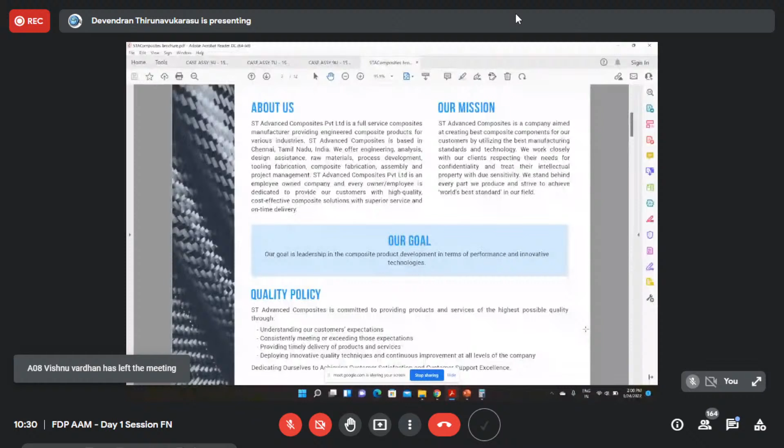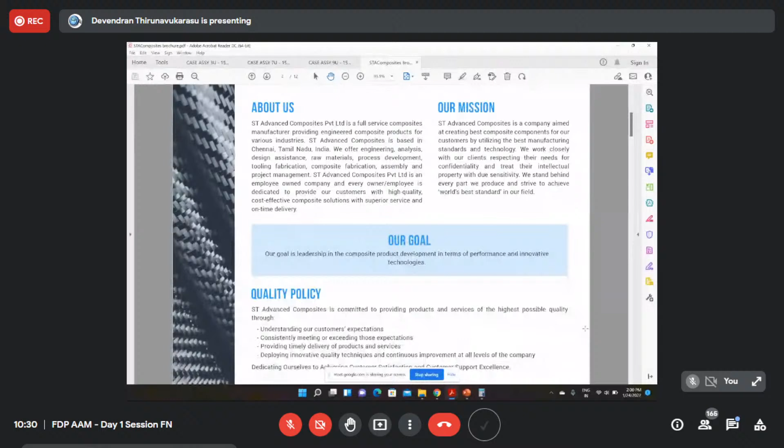Like in marine also we are working, and some of our clients give us a problem statement, and we find the solution, giving solutions for lightweighting and improving the performance of their product. Even in marine, right now we are working with L&T Shipbuilding. They are facing some problems in their shipyard, and we are giving solutions using composite materials to resist corrosion, and also to improve impact resistance against tide waves. That is one notable client we are currently working with for solving a problem statement.

And another thing, in aerospace, we are working with DRDO for projects, and we are also working overseas. We have an aerospace project with Dubai Space Center - we are supplying carbon fiber parts for Dubai Space Center and also the UAE Space Agency.

This is a notable client right now. I will explain in detail in the other slides. It started from motorsports and then aerospace. Initially we were working on drones and unmanned air vehicle structures. Currently we are producing real-time aerospace projects and products also. I will explain more in the later slides.

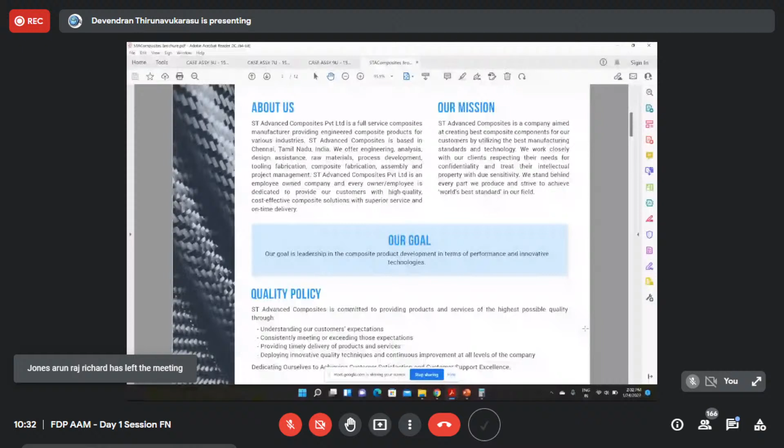We are giving quality because we are not compromising on quality in our organization, delivering without voids and without any delaminations, using the facilities available in our company and in India. We are trying to give the highest quality and the best product to our customers.

So this is the methodology we are following in our company. Initially we get the customer requirement, because we are not only focusing on a single sector - it's a multi-sector solution providing company. We get the problem statement from our customers, our team works on it, and we find the solution.

From the design side we support with design and optimization, material selection and process selection. Tooling depends on whether they need a prototype, a single-time product, or a multiple product - based on that we select the tool. Tooling cost is a high factor in the composite industry, so we work on tooling material selection, either soft tool or permanent tool.

The soft tool means it's a temporary tool for a single prototype. Based on our customer requirement, we select the tooling material. Then from the prototype we also provide testing solutions.

Whether they need componental testing, coupon testing, or full-scale testing, we support this. We are collaborated with universities and have tie-ups with IITs and private laboratories. Based on the project, we get it tested in various institutions.

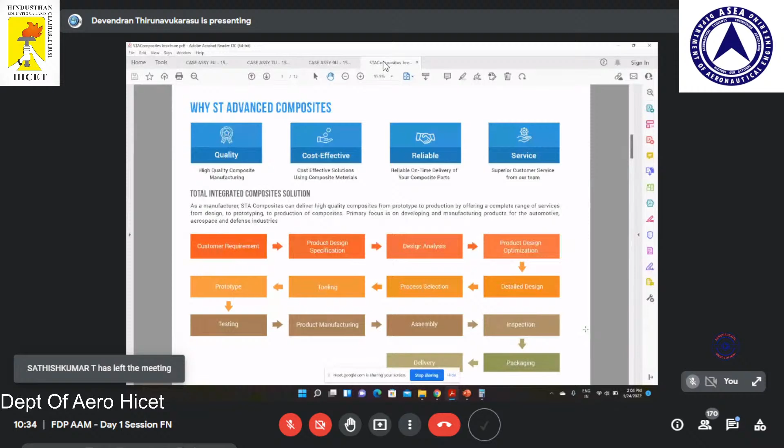We also supply material to institutions for R&D purposes, because we support students with projects. We give internships and training programs, and we conduct training programs for faculties and students. During that time we introduce advanced materials to them and give hands-on training also.

Before COVID, in 2018 and 2019, at VIT Chennai and several other universities we directly conducted development programs. During that time we were supplying materials for their R&D.

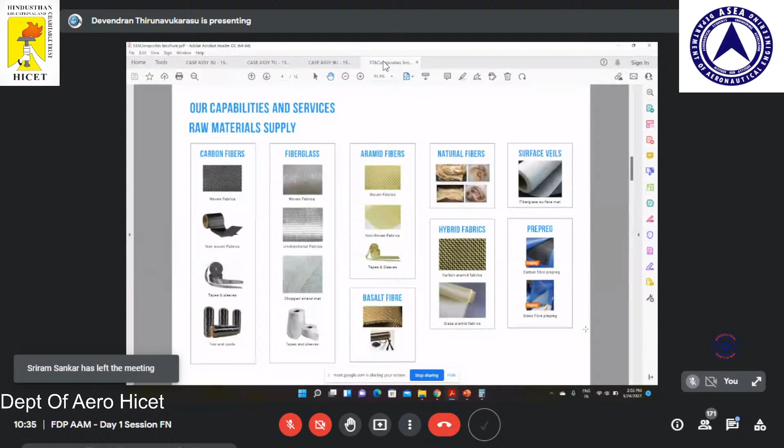These are other materials we supply, like vacuum bagging systems, resins, core materials, and nano materials - currently we are trying to implement nano materials into real-time products using carbon nanotubes and graphene. These 2D and 3D materials we are also implementing into structural and functional products, like batteries - currently we are working with one company to provide a solution for them.

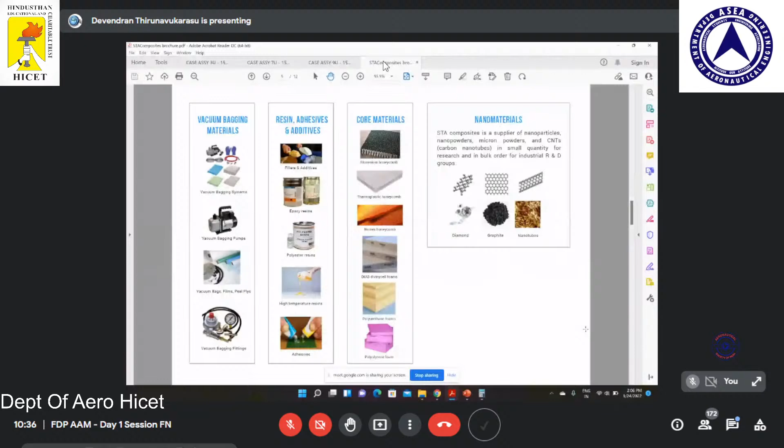This is the design and analysis part. In India composite design is very expensive, and companies are not using exact composite design analysis. Here we provide the exact approach - even Boeing and Airbus use the same method that we follow here.

From the layer-wise analysis we plan, because composite is two different materials combined as a single material, giving good properties - it is an engineered material. There are factors like ply orientation and material properties - if we change the orientation, we can get better properties.

Here we mention 0, minus 45, plus 45, and 90 degree orientations. If you use 0 and 90, we can get better tensile and compression properties. The plus or minus 45 orientation is for...

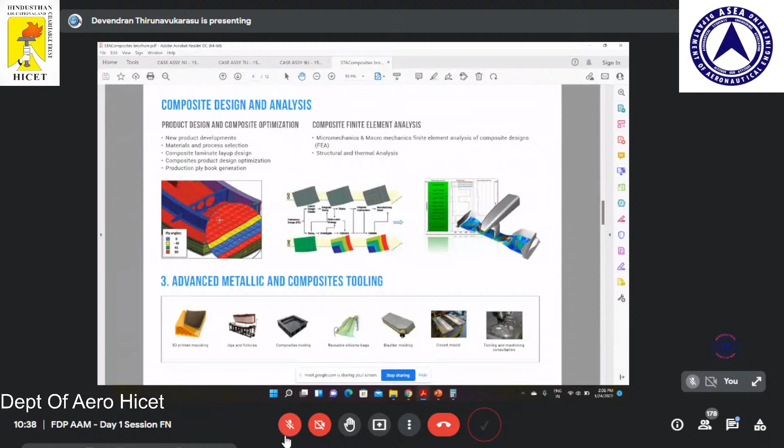There are different types of tools, as I mentioned, including 3D printed molds. We use tooling with fixture and carbon fiber tools. This is a reusable bag, this is a bladder mold, this is a closed type of mold, and this is machining and processing.

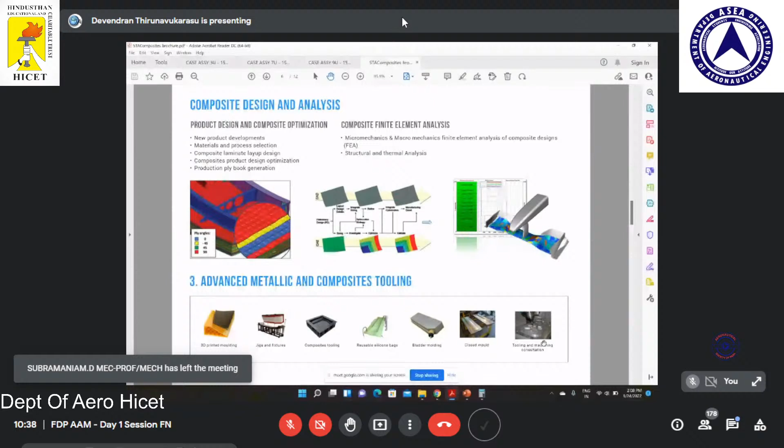We also do consultancy for tool development. This is our prototyping service. Prototyping starts from the basics, beginning with clay modeling.

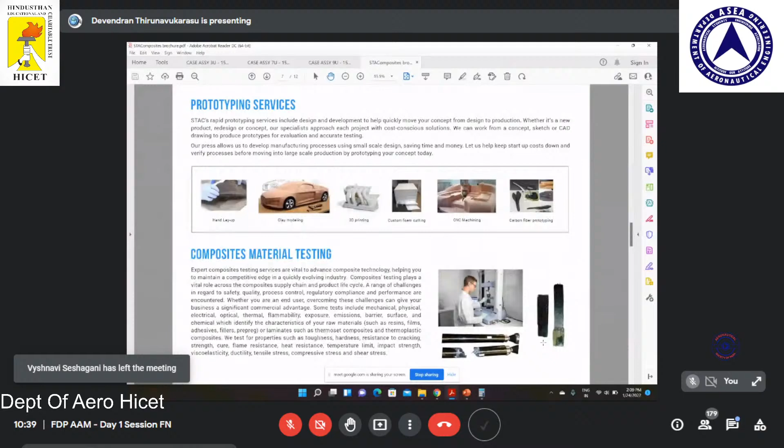In all automotive companies, they initially start with industrial clay modeling, then 3D printing and foam cutting. Foam is used for smaller prototypes, and wooden prototypes using medium density fiber board, which is available in the market, are also made using a machining process.

We also do carbon fiber prototyping based on our customer's requirement.

For testing, we have only one or two in-house testing facilities, but otherwise we collaborate with institutions and private laboratories across Chennai. Some samples are tested at PSG Coimbatore, as we have a tie-up with them and they test our samples using their material.

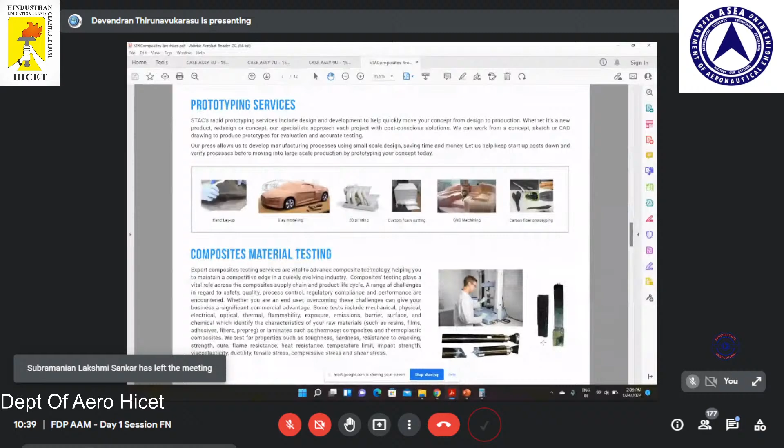These are the manufacturing techniques we currently follow: electric curing oven, compression molding, vacuum bagging technique, closed mold and resin infusion for larger structures, bladder mold for blades and other structures, and roll wrapping. Based on the project, customer requirement, and budget, we select the process to satisfy their needs.

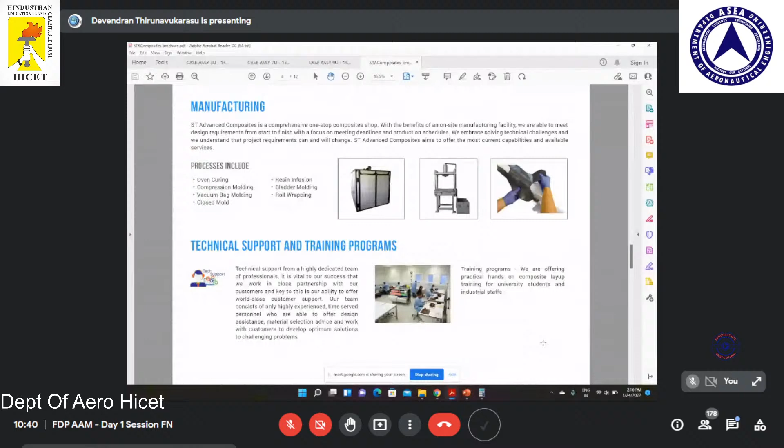We also provide technical support and training programs for engineers, as well as research scholars and students in institutions.

These are some products we have been supplying, including carbon fiber tubes, sandwich panels, and plates for drone manufacturers. University students also buy these products for their college projects and for competitions involving drones and other structures.

We also make custom products. This race car was where we initially started with motorsports, so we have this kind of product line: a carbon fiber seat, a monocoque structure for race cars, a battery box, a one meter size blade for unmanned air vehicles, and suspension linkages.

As I mentioned in the previous slide about training programs, we provide a laminating kit for participants and give hands-on training.

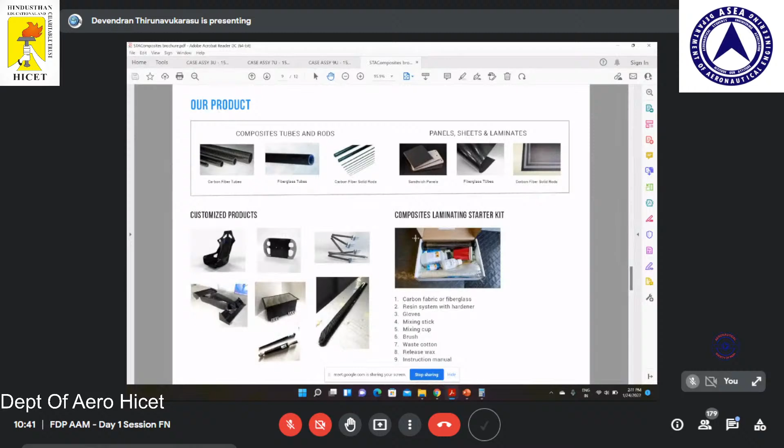These are our success stories, mentioned up to 2016. After that, I'll show some other things in the following slides.

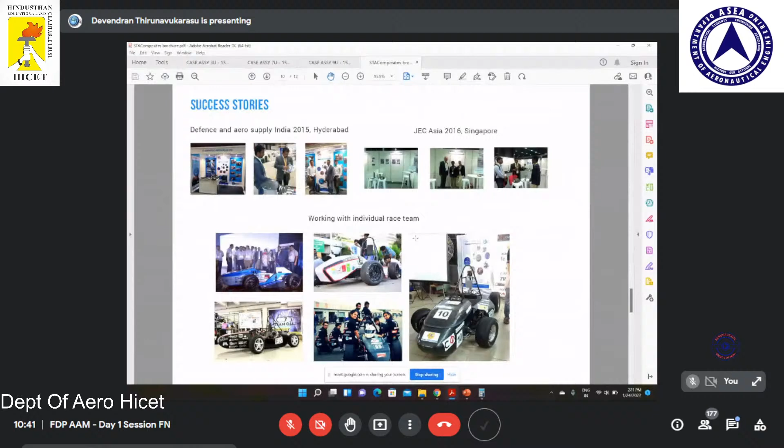In 2015, we got a stall at Defence and Aero Supply India, where we presented our products, including a bulletproof helmet we were developing through R&D in our company. We presented there and got good tie-ups and introductions with companies. This is 2016, where we got a stall at JEC Composite Asia.

This is the largest composite trade show in India, sorry, in the world.

So we got a stall, and we also presented here. There we got a lot of collaborations, and the introductions into the international market.

So these are the teams we currently support: IIT Bombay, SRM University and IIT Madras, VIT Vellore, Chitkara University Punjab, and also another team from IIT Madras. We are sponsoring the teams and guiding the students on how to manufacture the monocoque structures and composite panels for their vehicles.

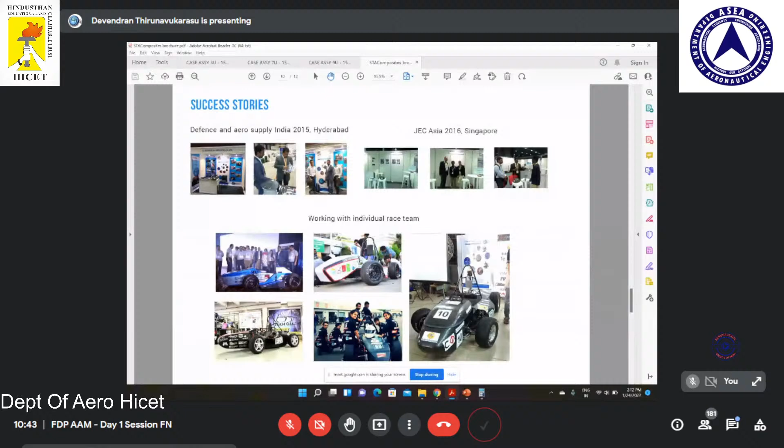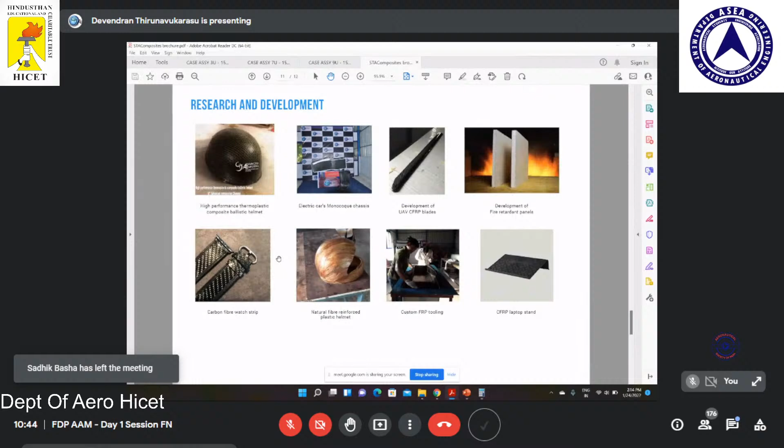Yeah, that's all, this is our company's short introduction. Then I'll move on to today's presentation.

Hello? Hello? Hello? Yes, sir, audible, sir. Audible. Okay, yeah, so now I'll move on to today's presentation.

Today I'm going to present the development and characterization of natural fiber reinforced thermoplastic composites. Today's faculty development program is about the characterization of aerospace materials, but here I'm going to present natural fiber.

Why the link between aerospace and natural fiber? We are trying to use natural fiber reinforced thermoplastic in the interior materials for aircraft. That's our idea. But there are many qualifications required for materials, and currently developing material needs qualification, because if we are going to use natural fiber reinforced thermoplastic material in aerospace or aircraft interiors, we need a lot of qualifications.

But here we are using thermoplastic. The thermoplastic is already currently used in aircraft interiors. Currently they use high performance plastics like PEEK, PPS, and PEI, which can withstand up to 350 degrees Celsius.

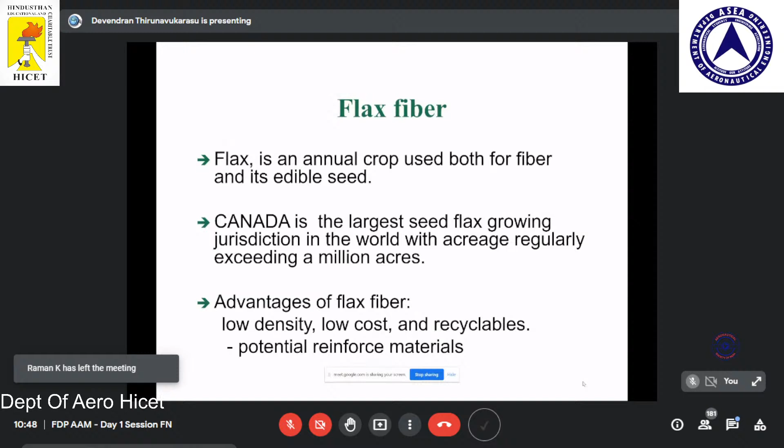The flax fiber as a reinforcement has three different fiber categories. Fiber 1 has a fiber content up to 98 to 99%. Fiber 2 category is 85%, because there are some impurities.

Fiber 1 depends on the quality; the fine fiberization yields up to 99% fiber content. In fiber 2, there are a lot of impurities, which is why it's 85% - the processing cost is higher there. If you need pure 99% fiber, you need higher processes, so that's why the cost is included.

The fiber flax 3 category is 42%, with a lot of impurities and some waste materials. Fiber 1 can be used as reinforcement for composites, and fiber 2 and 3 can be used for insulation panels for houses and alternative construction materials.

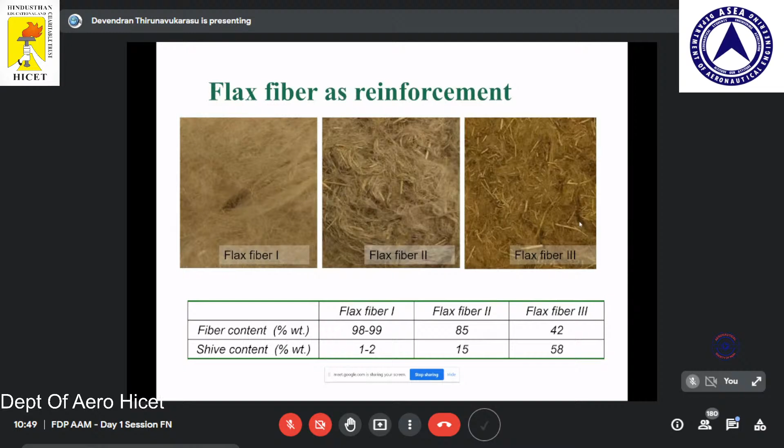This is the composition of the biofiber. The biofiber structure has four kinds of ingredients: cellulose and hemicellulose, pectin and lignin, and wax, and also water content.

High category fibers are flax, hemp, jute and sisal. Jute and hemp we have now. India also has the source, and flax is also available in some percentage.

The categories mentioned include cellulose, which is an important material for reinforcement - we need this cellulose alone for our composite. So initially we have to do the retting process and alkaline treatment of the fiber.

The first step is to remove the water content from the fiber. The second step is to remove the wax, which is dissolved just by being in hot water.

Pectin and lignin are the hardened materials in bio natural fibers. For pectin and lignin, we have to use alkaline treatment or acid hydrolysis to remove that part. But right now lignin is being used for reinforcement - lignin is a kind of natural fiber thermoplastic.

Currently some companies are trying to use lignin as a raw material for many applications in Europe. Hemicellulose is also used, but when we do the alkaline treatment and acid hydrolysis process, these two parts are removed, and finally we can get 64% cellulose - giving us good reinforcement strength in our composites.

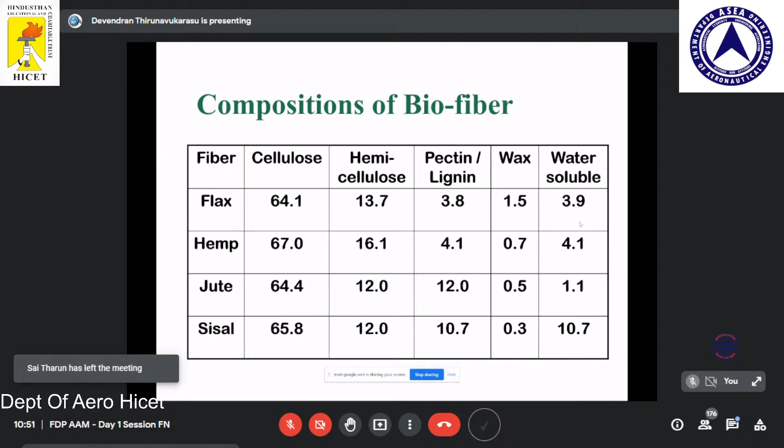The biocomposite consists of a polymer as matrix, a biopolymer as matrix, and the fiber as reinforcement. These two materials together give us a composite, an engineered material for many applications.

The interest in using natural fiber as reinforcement is currently growing, with many applications. That's why they are using natural fiber. Some potential applications for this kind of panel are doors and instrument panels, and our scope is to plan to use this kind of part in aircraft interiors.

But for aircraft interior parts, we need qualification testing and certification from agencies. I think it will take so much time and so many years to get approval for this kind of natural material. But there are other applications too, especially in aircraft manufacturing.

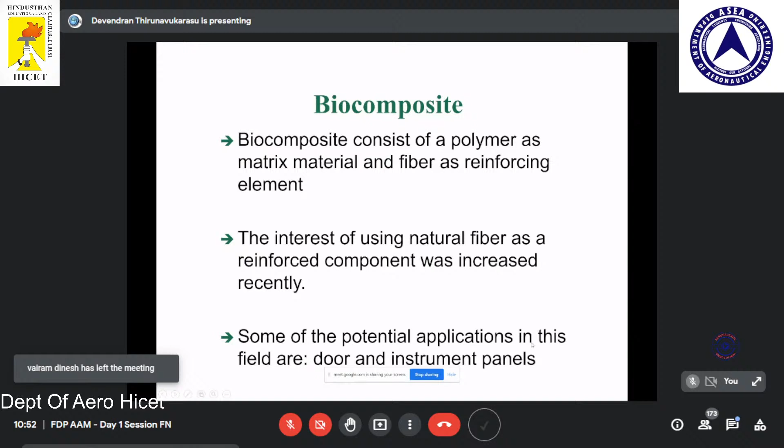This is the biocomposite production - the fiber production process. The first step is we have to ret the straws. Suppose we are getting fiber from flax, it's first in the form of straws. So we do the retting process, scrutching, scrutching fiber, and hackling - these are the processes of producing the fibers.

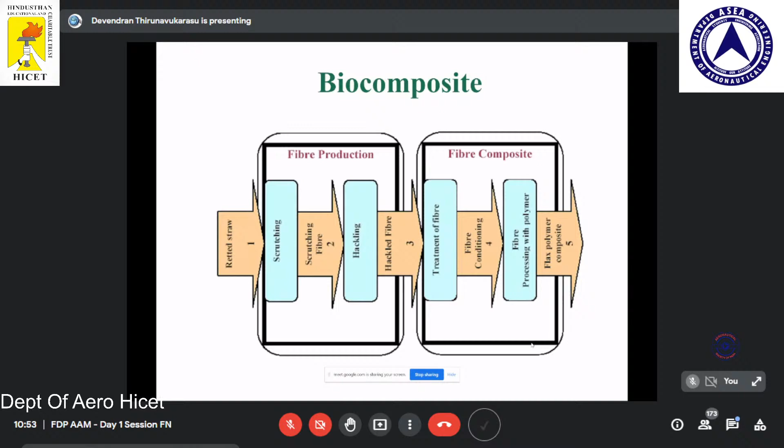Then there's treatment of fibers and fiber conditioning. If the fiber is not uniform and has a lot of entanglements, we have to condition the fiber and form it into unidirectional or yarn and weaving. Then finally we process the fiber with a polymer, any kind like thermoset or thermoplastic, and we get flax reinforced composites.

So these are the advantages of natural fiber composites: a renewable raw material base, biodegradability, and reduction in fossil fuel resource consumption, lower greenhouse gas emissions, and lower overall environmental impact. The advantages I mentioned in the previous slide, low density and high mechanical properties, are there because the cellulose content is very high.

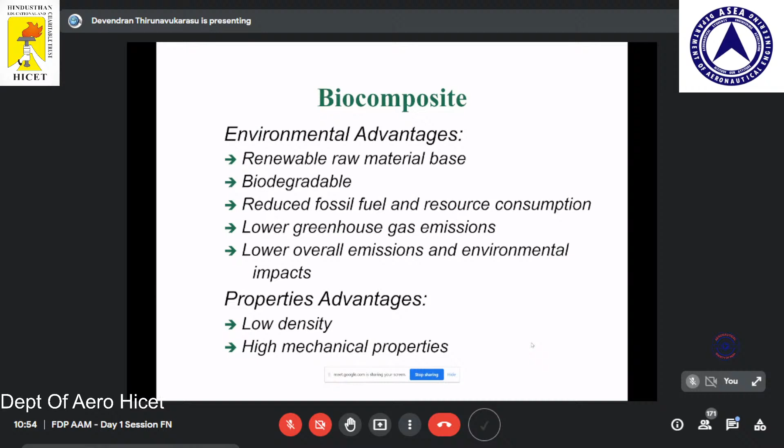These are some examples currently used in the market. They are used in the automotive industry, where we don't need extensive testing and qualification. They are used for interior applications because the strength is equivalent to glass fiber, so we can consider it for interior panels in the automotive industry.

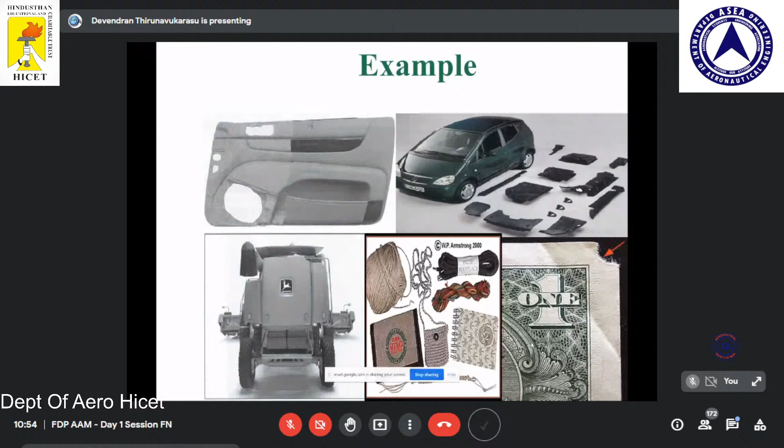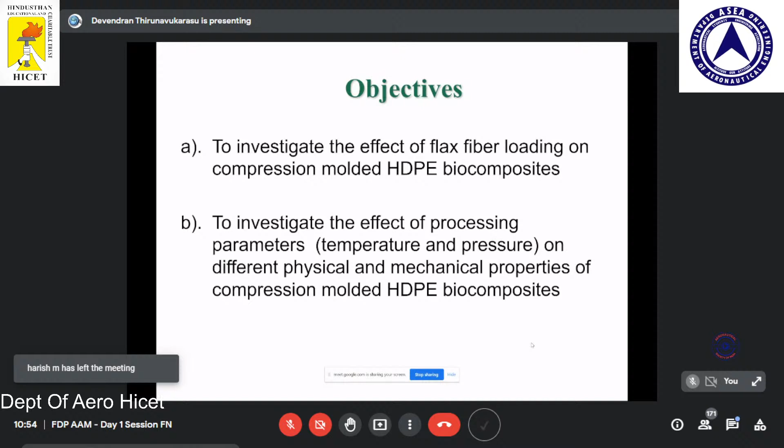The objective here is that we used high density polyethylene as a binder of the resin system, and we investigate the effect of processing parameters, temperature and pressure, on different physical and mechanical properties of compression molded high density polyethylene biocomposite panels.

So here we used high density polyethylene as resin as a binder, and silane treated fiber, because silane treatment can improve the coupling. The silane is a coupling agent, and we can get good adhesion between the polymer and the fiber, which improves the fiber-matrix interface properties.

Here the flax fiber loading is 10, 20, and 30% by weight, with control samples. The molding temperature is 150 and 170 degrees Celsius, and the molding pressure varies from 6.89 to 10.3 megapascals.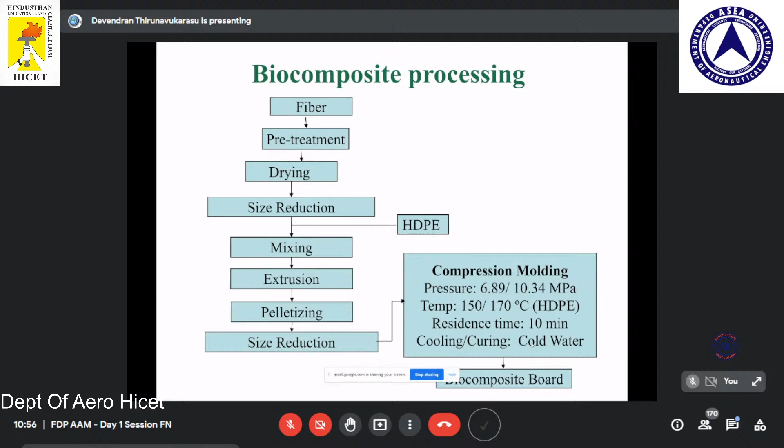This is the process for pre-drying and blending, the compounding of the natural fiber and high density polyethylene. This process melts the material, and we optimize the twin screw extruder blades, because when using natural fiber, a conventional screw extruder would damage the fiber. That's why we optimized the twin screw extruder blades.

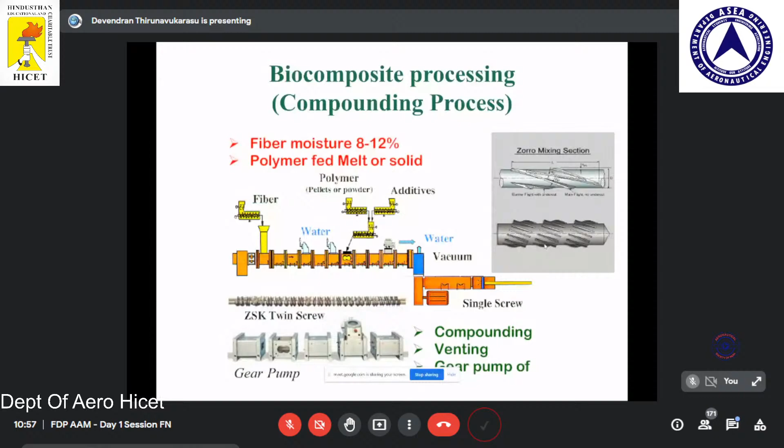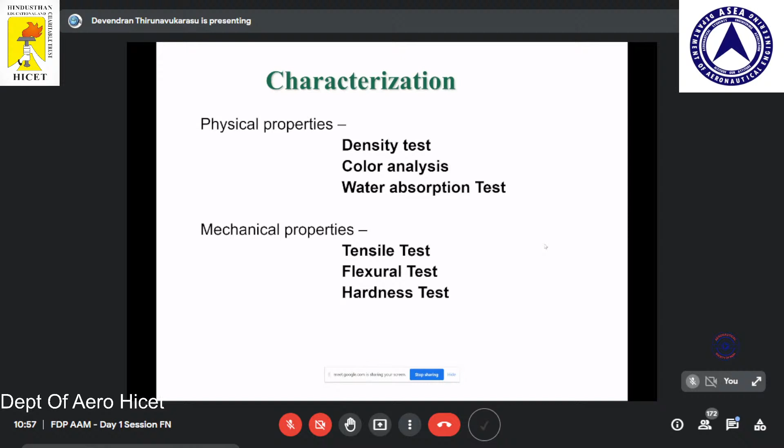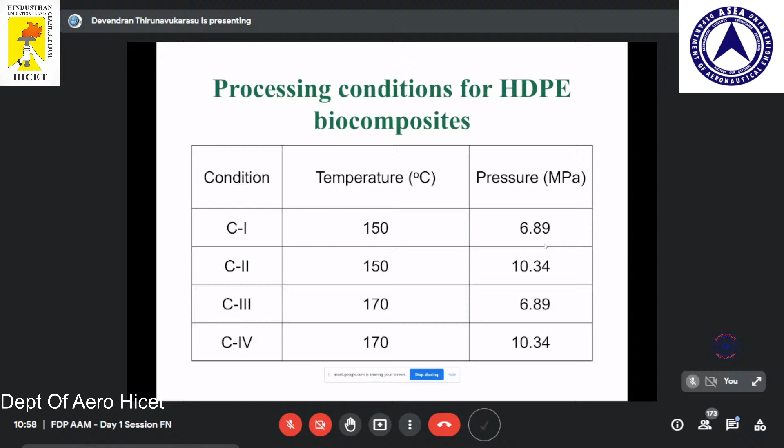We consider this to optimize the process parameters, the processing conditions of the high density biocomposites, at various temperatures and pressures. We used temperatures of 150 and 170, and selected two different pressures for different conditions: C1, C2, C3, and C4. This is the sample ID, based on fiber loading: we have 10%, 20%, 30% fiber, and pure high density polyethylene samples.

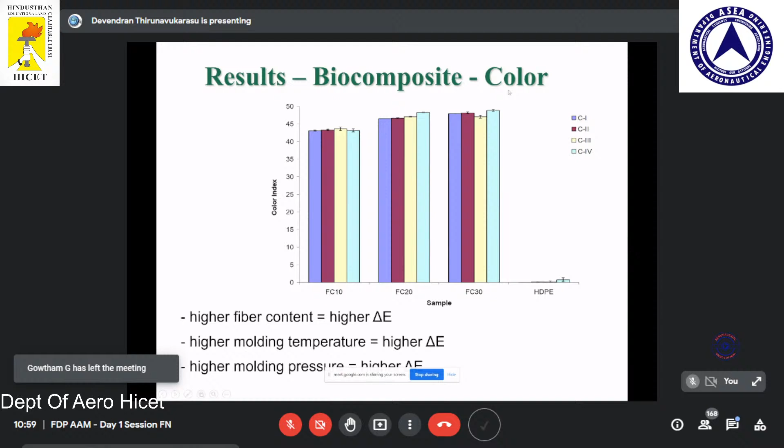The flax fiber density is greater than high density polyethylene, so if you increase the fiber content, the density increases. That is what we concluded here.

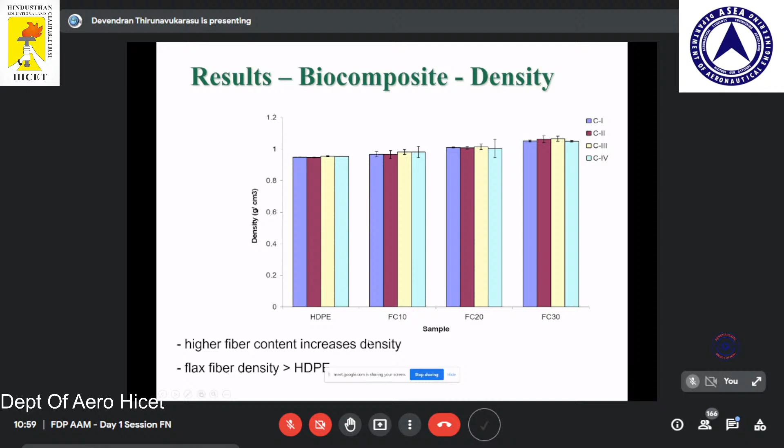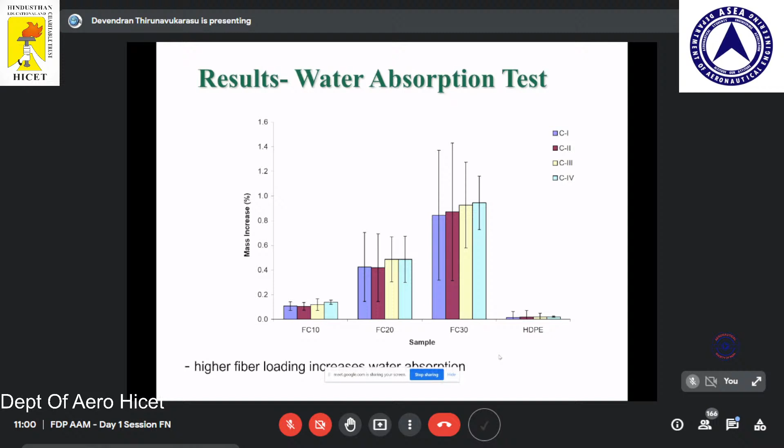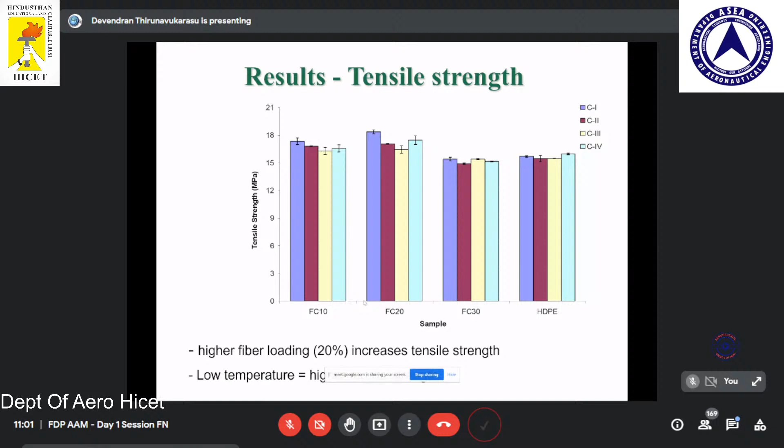This is the tensile strength and Young's modulus from the tensile test. The Young's modulus is increasing with higher fiber loading. The strength is highest in FC20, meaning the 20% flax composite has a good tensile strength, and the higher volume content gives a good Young's modulus.

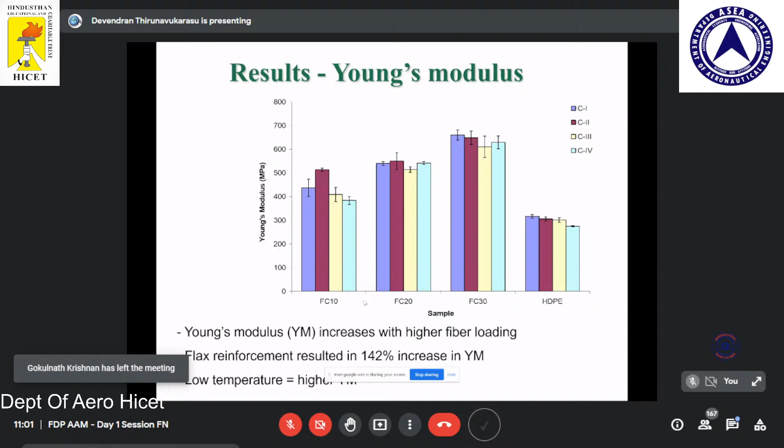The stiffness of the material is high. So the lower the temperature, the higher tensile strength we get. That's one more result we got from this test.

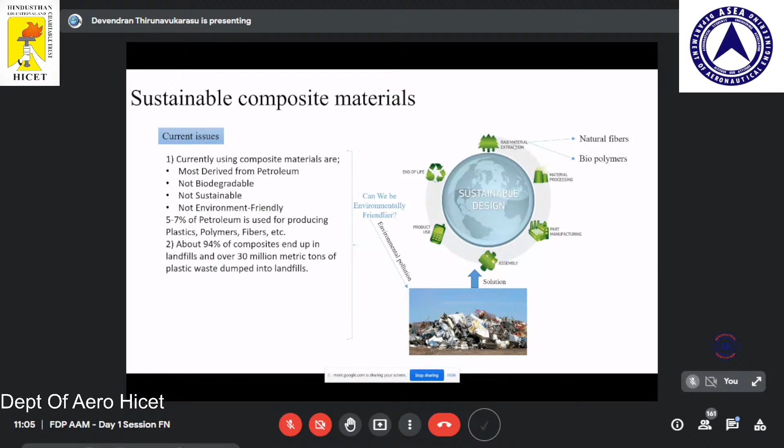This is one of our in-house developments. We are using pineapple fiber, extracting it from pineapple leaves. Then we do the extraction, followed by process treatment, chemical treatment, drying, and chopping into small fibers.

Due to time, I'll go fast through this slide. This is the fiber extraction process. We finally do the alkali treatment to get the short pineapple fibers.

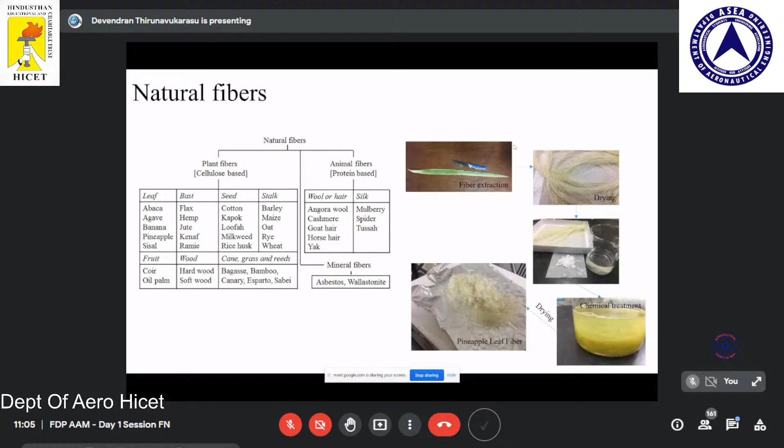So why natural fibers? As I mentioned in the previous presentation, we have a lot of natural resources in our country. A good example is banana, because in southern India we have a lot of waste from banana leaf and banana use day to day. We also have a lot of waste from pineapple and other such resources, all of which are available, which is why we are finding natural fiber products from these available resources.

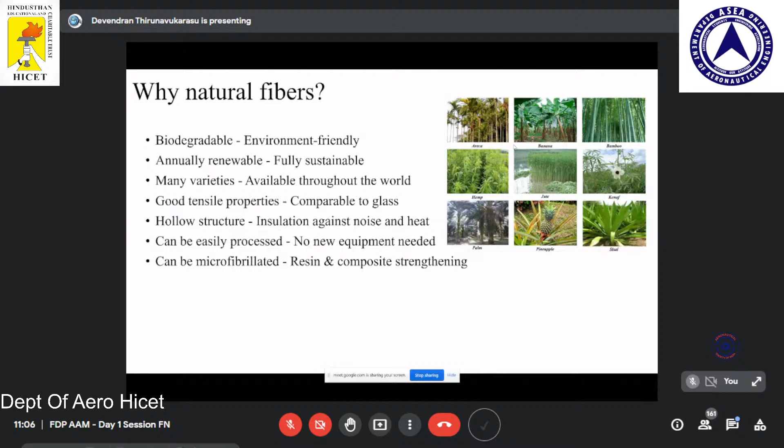And these are the properties of the natural fibers: cotton, flax, hemp, coir, bamboo, softwood, and pineapple. I mentioned their properties. Previously, a lot of researchers worked on this, so we can get data from various researchers.

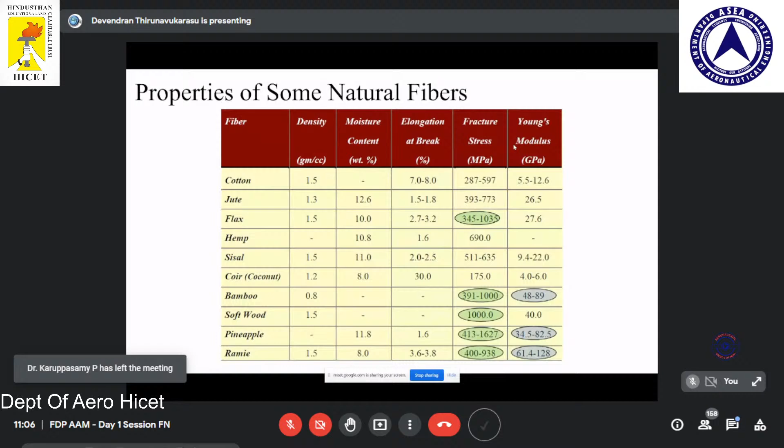Here are the biodegradable polymers. They are also from natural sources, polysaccharides and proteins. Some agropolymers and biopolyesters are there, and we can use them. We have to select based on our application, so we can select the biopolymers accordingly.

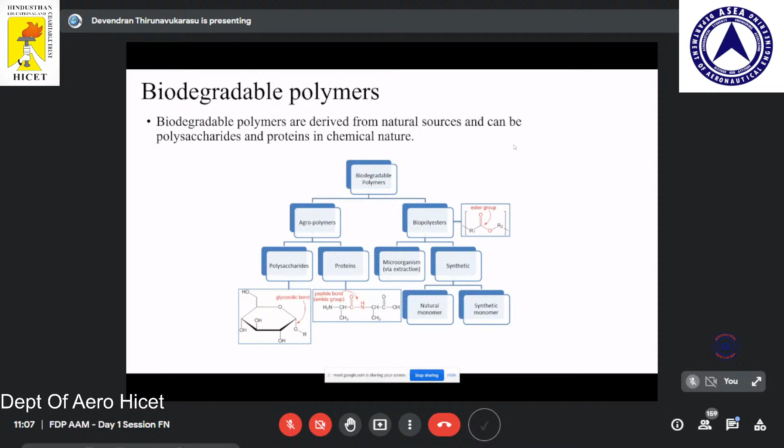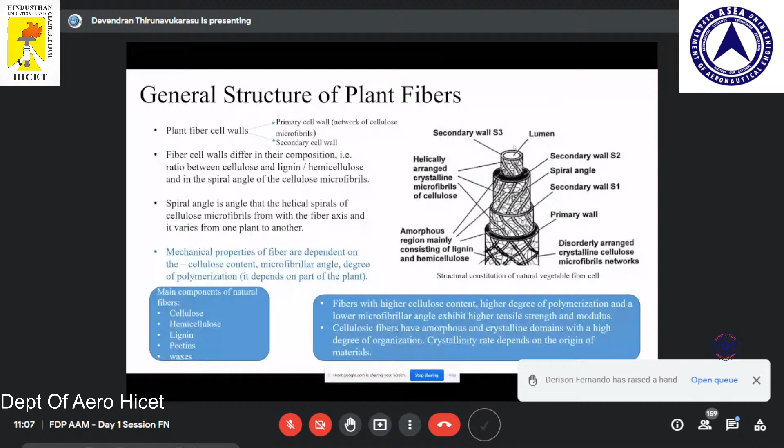This is the basic plant structure, as I explained in a previous slide. The plant has various layers, and the constituents are there. The main components of the natural fiber are cellulose, hemicellulose, lignin, pectin, and wax.

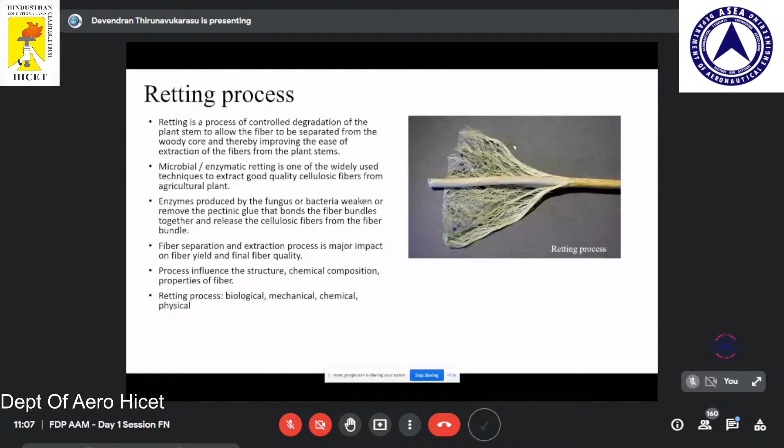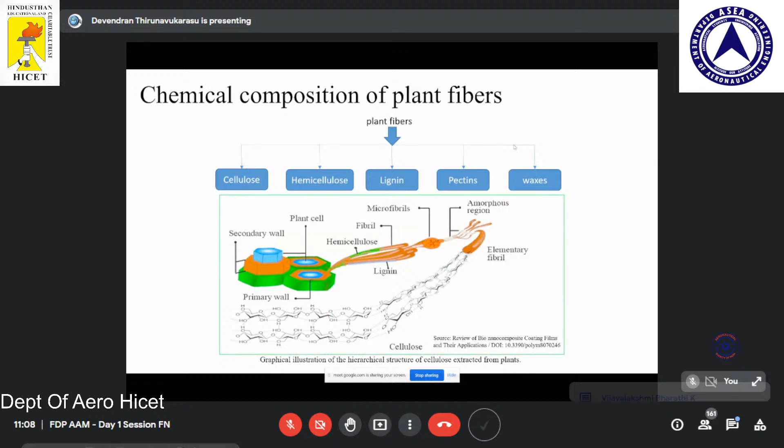These are the cellulose microfibrils. In the microfibers there are a lot of cellulose chains. The cellulose chains have a lot of functional groups connected, almost 30,000 cellulose microfibers into this, and the size of the microfibers is 10 to 30 nanometers.

This is the cellulose nanofiber. It has crystalline and amorphous regions, and it's a very strong material. It's already proven worldwide. They use it for the pharma industry, food industry, as an additive, and as a reinforcement agent. Currently we are trying to use it in structural applications for strengthening and insulation.

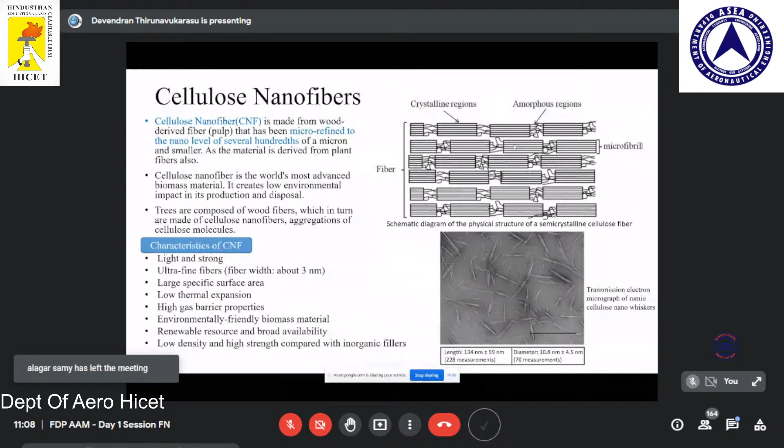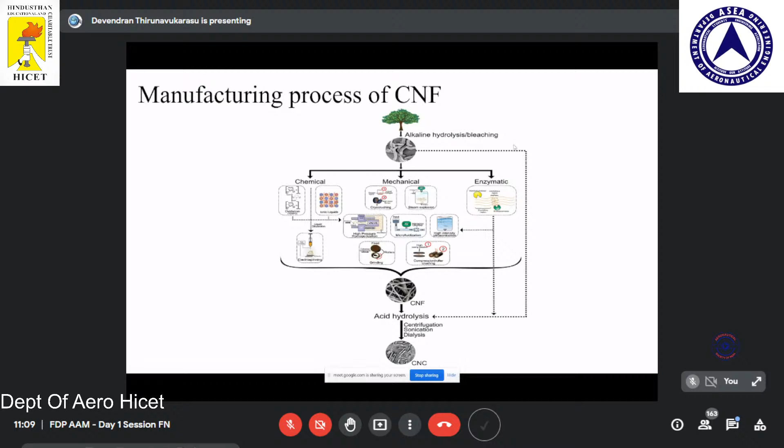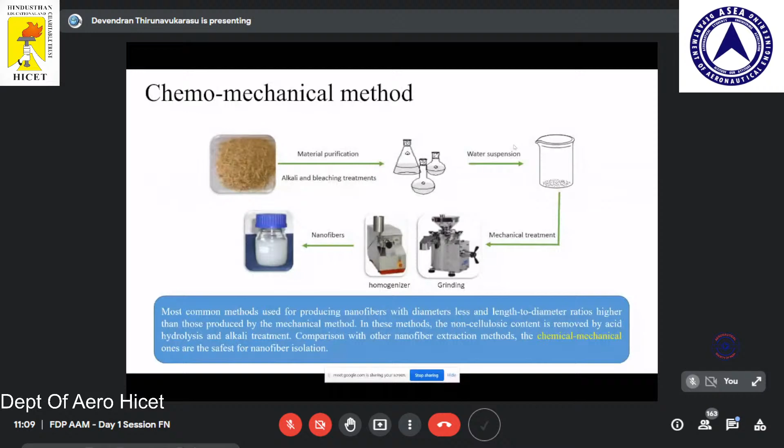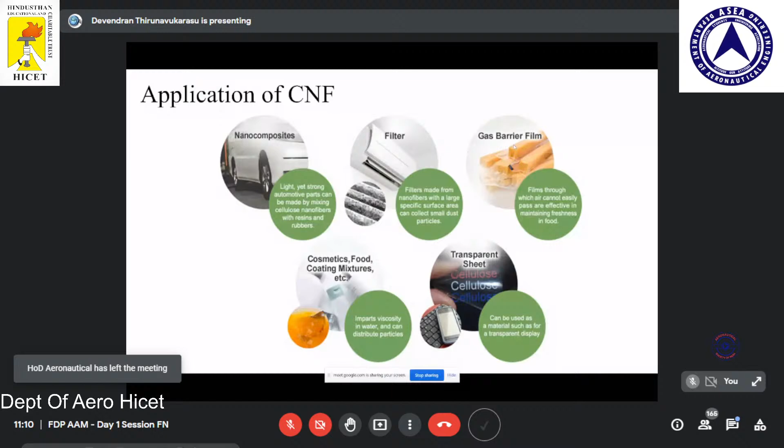There are various applications: nano composites, filter applications, gas barriers. We can use it for food industries and packing applications, transparent sheets for electrical applications, cosmetics, food and coating, and other mixes. We can use this nanofiber for commercial applications too, but we are focusing on nano composites for automobiles and other rubber additives. We are planning for that.

We have some results I'll share with you, because this is cellulose nanofiber, and currently I'm working on it.

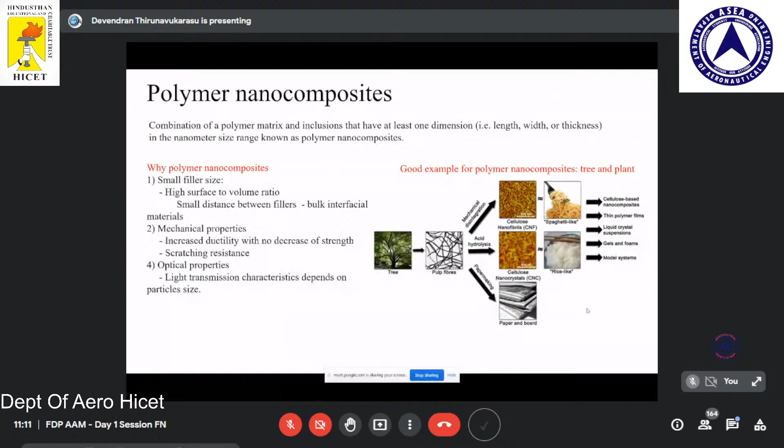This is our development: we made an epoxy sheet and CNF film, the cellulose nanofiber films, using a compression molding process. We can develop cellulose nanofiber reinforced composite films for structural applications. This is our small R&D work.

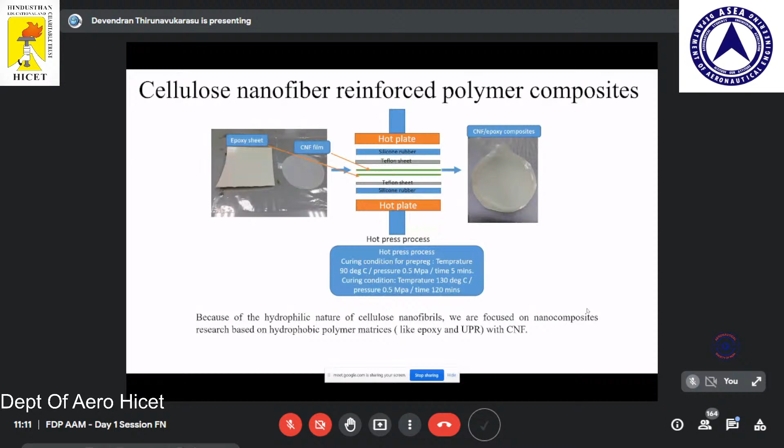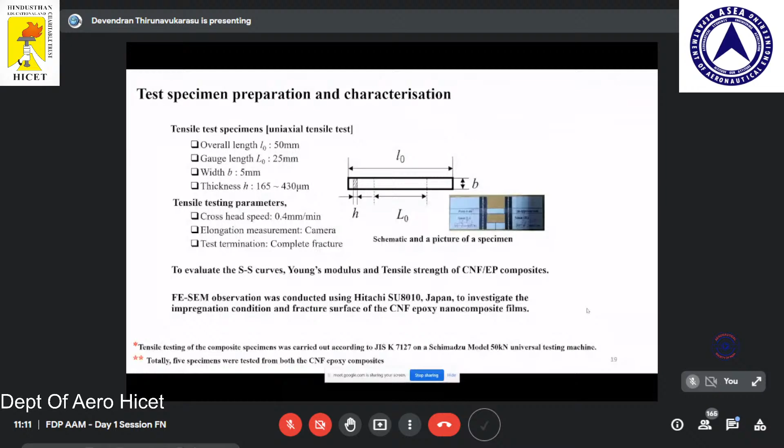This is a measurement of physical and mechanical properties, and this is a sample development: 50 is the length and gauge length is 25 millimeters. This is a scaled-down model, based on the standard we used.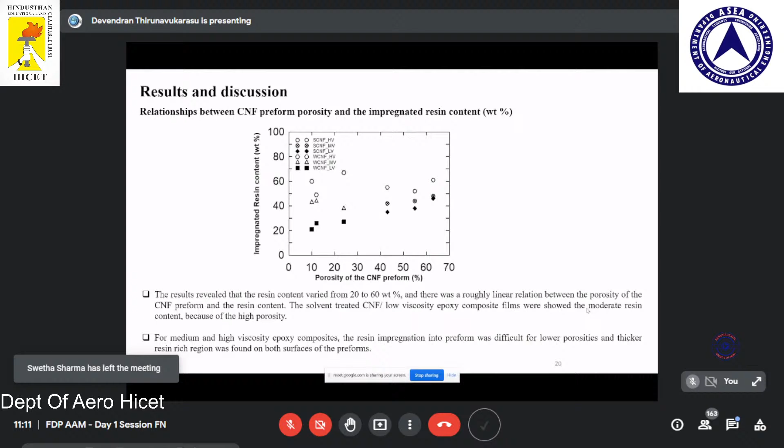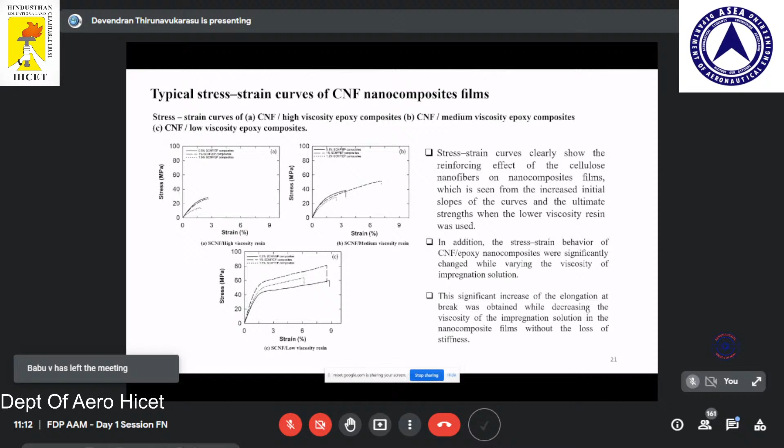This is a stress-strain curve, and the value mentioned here is 0.51. Because this is a nanofiber, we only load a very low percentage, like 0.5, because its surface area is very high. That's why we load a very small amount, because all nanomaterials have very high surface density and surface specification.

Here we have different resin systems: high viscosity, low viscosity, and medium viscosity.

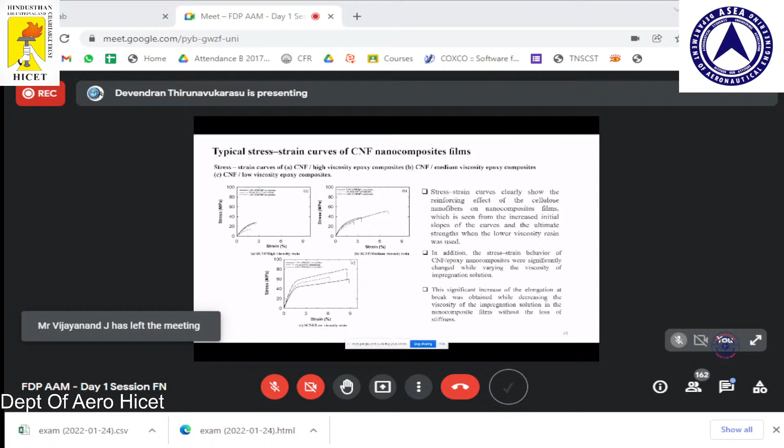Low viscosity resins have better mechanical properties compared with high viscosity resins, because high viscosity resins are difficult to impregnate—they just get deposited on the film, whereas lower viscosity resins impregnate well into the nanofilms. This affects the Young's modulus.

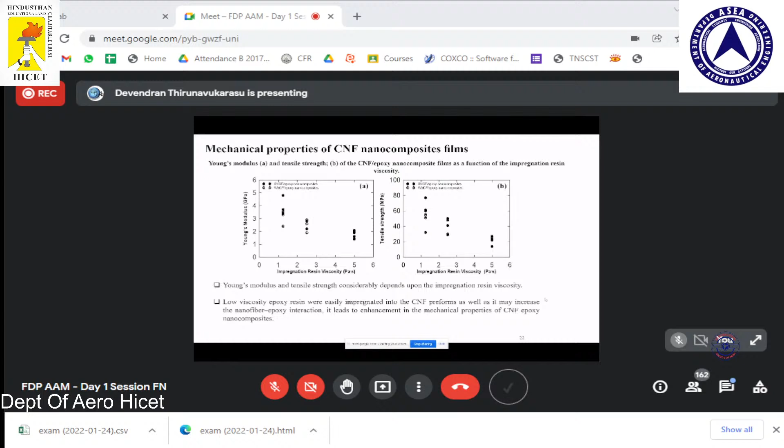For the different types of nanofibers we mentioned, impregnation as I told is very good with lower viscosity resins, so we can get good stiffness and mechanical properties.

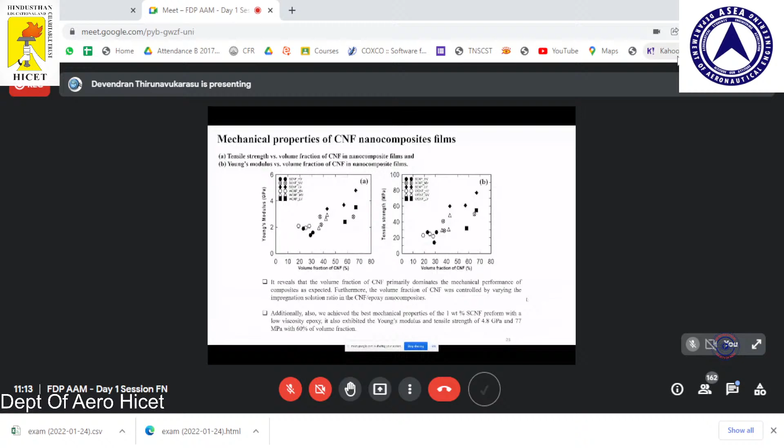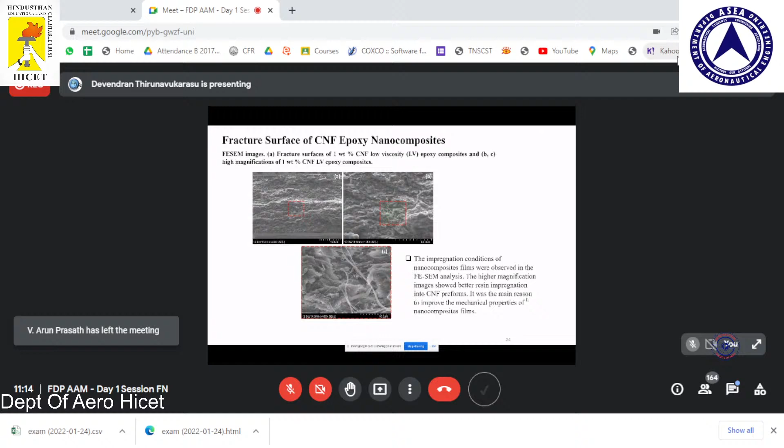We confirmed our composite films have better impregnation using FE-SEM analysis. This is the fiber breakage observed through FE-SEM analysis. The fracture revealed pullout of nanofibers or thin fiber bundles with sub-micrometer diameter, rarely observed in the FE-SEM analysis.

Finally we got clarity—the nanofibers show a pullout mechanism. So currently we are thinking about this. We need to find the breakage or failure mechanism of nanofibers. This is a new trend going on: if we use nanofibers or nanomaterials, we must study their failure mechanism.

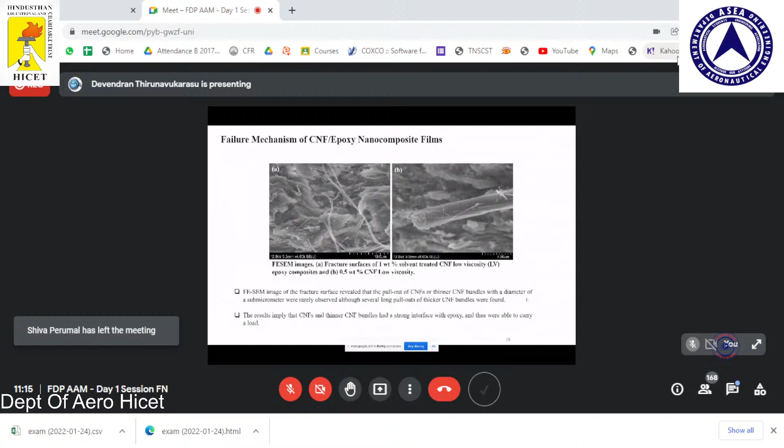We tried to observe what kind of failure mechanism happened, and we found some fiber pullout and also some resin breakage. The resin breakage was observed, but mainly fiber pullout was observed in our research.

As a conclusion: CNF nanocomposite films were successfully produced with the hot press technique using lower viscosity resin. We achieved around 60% volume fraction. This revealed that 1% CNF preforms with lower viscosity epoxy resins have good mechanical properties—Young's modulus of 4.8 GPa and tensile strength of 77 MPa.